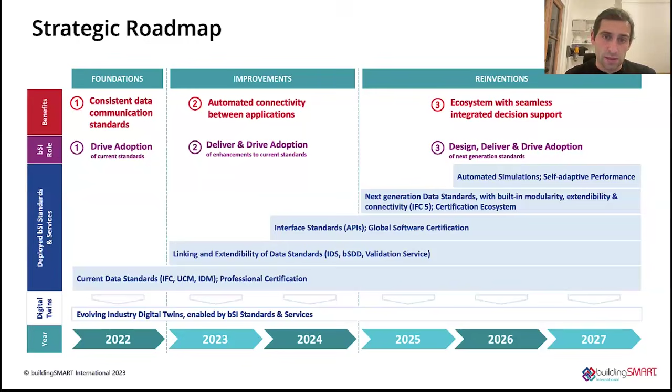What is interesting about how we put the geospatial context to that - I said earlier that everything within the BIM world has a location associated with it. When you think about radical advances in GPS and camera technology for things like photogrammetry, we can start to envisage how BIM and GIS workflows will really improve the lives of stakeholders and end users that consume this type of information.

In our strategic working groups, I'll highlight that we've had a BIM and GIS conversion group working for many years developing this work, focused on use cases and how we might align things like IFC, CityGML and LandInfra. We partnered with OGC on this and continue to lead a working group in this area. So we clearly see this as a huge priority, with work spanning many years around this topic.

I'm also reminded that this year I was very much struck - the idea stuck with me - it was Michelangelo Cianciulli at our summit in Rome who brought that idea to my head, which was there are incremental innovations and radical innovations. Incremental innovations happen continuously throughout our work life. We maybe don't notice them day to day, but over a certain period of time, we might look back and say, wow, can't believe we used to do that.

I might cite an example: I went to an oil and gas event around 2011, and at the time they were saying absolutely no way they're going to move to cloud technology. Fast forward 5 years, the whole conference was about cloud technology, because although that's a radical innovation, the incremental changes happened and then they became reliant on that new technical capability.

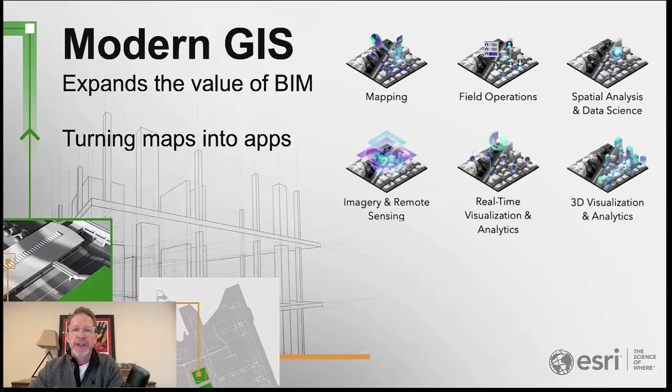Most people understand GIS to be a mapping solution, but it's much, much more than that. It's a suite of mobile applications for doing field data collection. It's the ability to do spatial analytics and deep data science across many types of data sets. It includes imagery, remote sensing, visualizing and analyzing information in real time from various sensors. It certainly is more than just 2D these days. 3D, certainly BIM, included with 3D maps and terrain, provide amazing visualization and analytics capabilities. It's a data management platform for understanding data of various types, including BIM, GIS, IoT sensors and imagery. And in the case of Esri, it's a suite of developer capabilities, APIs that allow you to take our base applications and base capabilities and extend them in many ways, and we'll get into that today.

BIM integration within the Esri suite of products, the ArcGIS solutions, goes back many years. As far back as 2015 with our flagship product ArcGIS Pro, where we started bringing BIM data into the Geo database, created the concept of a scene layer package. In 2017, we formed an alliance partnership with Autodesk, which really opened the door for us to extend the capabilities of our GIS platform by adding Revit integration.

A couple of years later, we extended ArcGIS building scene layer to include many different types of information specific to BIM and AEC workflows. Around 2020, ArcGIS Pro had an integration with the BIM cloud connection that Autodesk provides. And then around the same year, we extended our capabilities of ArcGIS Pro to have Civil 3D integrations.

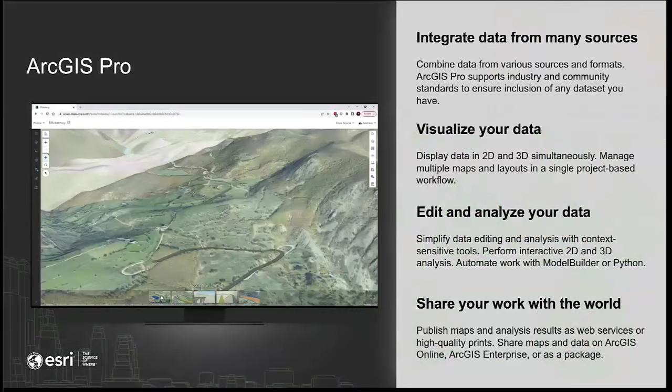So ArcGIS Pro, this, like I mentioned, is our flagship product. Any architect, engineer, construction professional who's working with CAD applications, imagery information, needing to visualize data, needing to edit and analyze a wide range of data, should have a copy of ArcGIS Pro sitting right next to their CAD and BIM solutions. The workflow is typically to create models, create scenes, create environments in the desktop application, and then share that work with the world through online environments like you're seeing on screen right now.

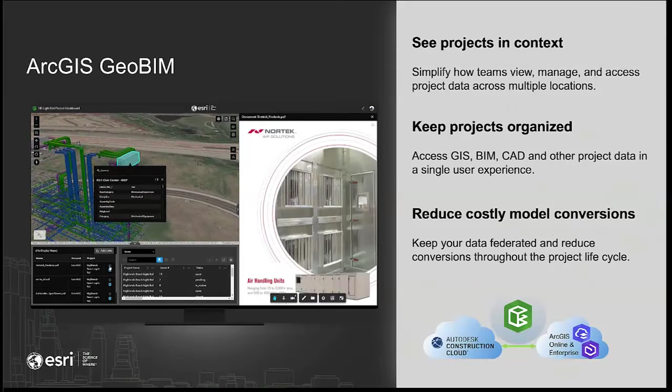ArcGIS GeoBIM, I mentioned this a little while ago. This was released about 2 years ago. This brings together the Autodesk Construction Cloud with the ArcGIS Online and Enterprise environment. So in a single desktop, you're combining the large-scale view of GIS with the more detailed view of BIM, in this case with Autodesk Construction Cloud.

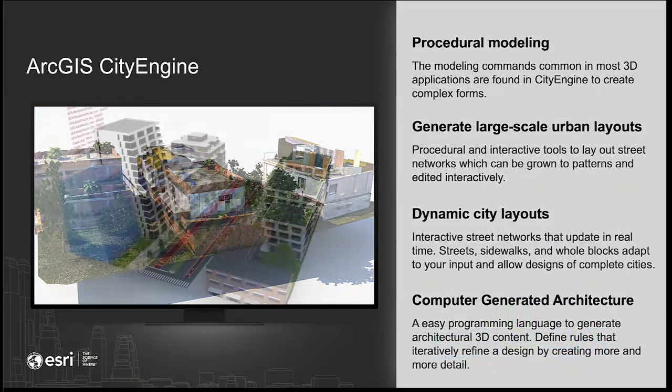And we have another application called ArcGIS City Engine, really one of my favorite products from Esri, which is a procedural modeling application. 3D entire cities are created through parametrics, large-scale urban layouts, and entire city layouts dynamically generated through parametrics. A computer-generated architecture capability enables the kind of environments you're seeing on screen, and we have IFC 2x3 export in that application.

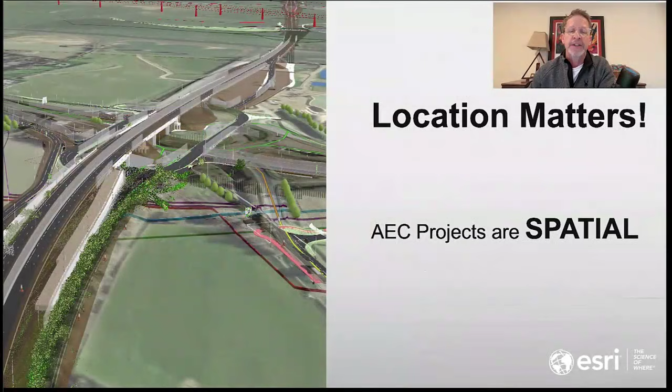So why in the world of AEC should GIS matter? Well, GIS is all about location. And certainly in the world of AEC, where projects are spatial, location matters.

Location acts as an integrator, a connector. It brings together the many types of massive data sets used in AEC workflow. Location acts as this common denominator and connector of AEC data. When you're able to connect data in a single application, viewing CAD and BIM, demographics information, weather patterns and traffic flows, when you're able to bring all this information together that typically exists on different people's desktops, you're actually able to connect people in a way that enables digital transformation.

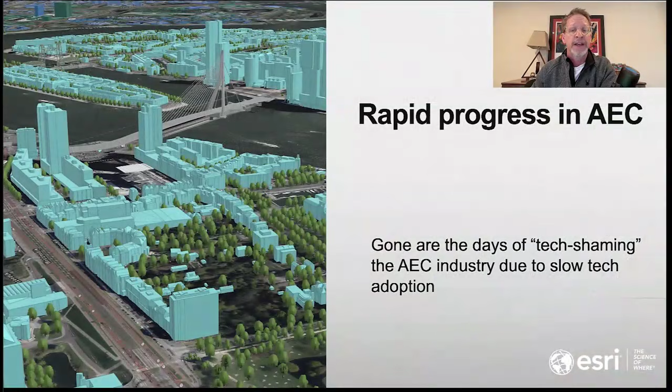And I would argue that digital transformation is critical for effective AEC project delivery today. The integration of data, the integration of apps is happening. It is required for effective project delivery, and digital transformation is happening in this industry. In fact, I would go so far as to say there is rapid progress in the world of architecture, engineering, and construction. Gone are the days where we're a little embarrassed about not adopting technology as fast as other industries, and I would say that the AEC industry is in fact leading the charge with the adoption of technology.

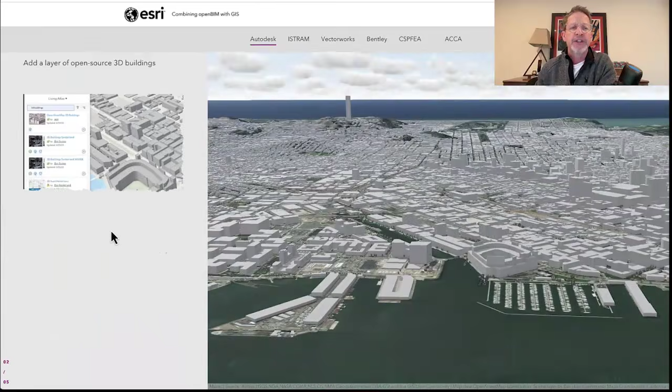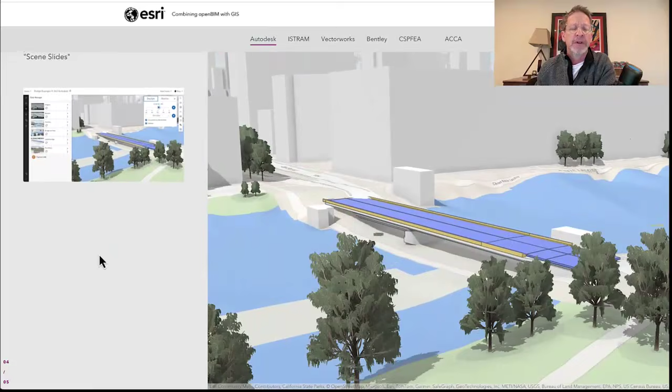I can zoom in to an area on the peninsula in San Francisco. We add a layer of 3D information in the form of OpenStreetMap data, including stadiums, roadway, buildings, elevation, etc. In this case, we created a model in Autodesk InfraWorks, exported it to IFC 4.3, and then imported it using the tools that come with ArcGIS Pro, our data interoperability tools. We can change our view, change the level of detail of our trees to be more detailed, and we start to see the bridge in context. Turn off a few layers, change some transparency, and you can actually see the individual objects that make up this bridge with the properties that began in a BIM modeling, a BIM authoring tool, in this visualized environment right here.

And again, this is a dynamic view. This is a real 3D map. This is not just a static image.

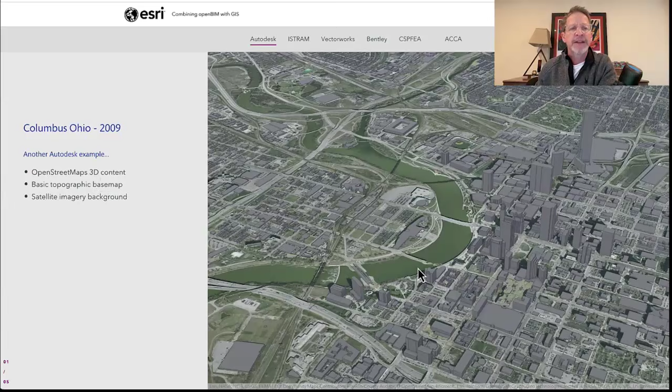Here's another example, similar workflow. Again, OpenStreetMap 3D content combined with a basic topographic map of Columbus, Ohio. This is the satellite imagery and the architecture from 2009. The city undertook a riverfront development program where you can see the same information. The river is a little bit lower and a little bit of development has occurred at the riverfront in this 2015 image. And here we see a 2021 view with a proposed bridge in place, again in this 3D environment in this story map.

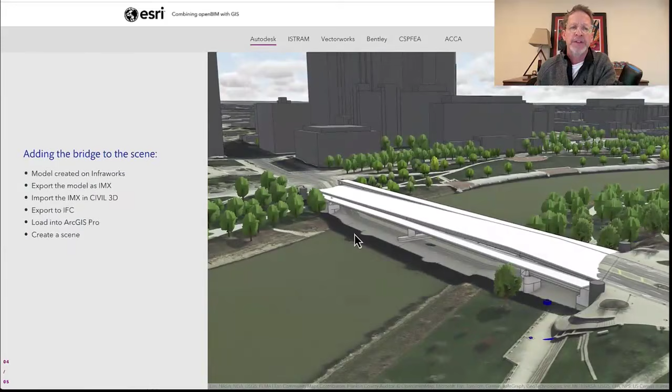So we added the bridge to the scene in a similar way that I described a moment ago, starting out in InfraWorks, exported the model as an IMX file that came into Civil 3D, and then from there exported it to an IFC into ArcGIS Pro. Again, these objects maintain their properties, the parameters, the attributes that began, here you can see IFC 4.3, in the modeling application itself, maintained and made available for GIS capabilities.

Again, change our camera angle, change our transparency, turn on and off some objects, and you can see all the way down to these structural elements, all the properties that you would expect to see in a BIM authoring tool, maintained and brought over for GIS purposes.

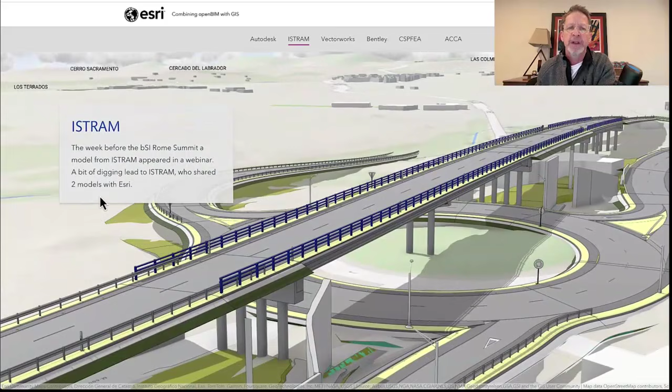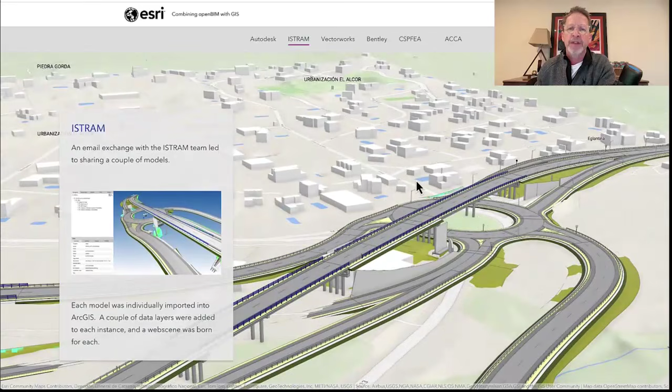Another application generates IFC files, a company called ISTRAM. This was a model that I came across about a week before the buildingSMART Summit in Rome last year. So I reached out to the modeling company, ISTRAM, and asked for a model they could share with me. Again, similar to what you saw in the other environments, this 3D model has GIS information, has BIM information, has OpenStreetMap data.

Here's the same view in a BIM viewer, and here's the view in a GIS viewer. All the geometry, all the non-graphic properties, they're all intact, ready to be used for various location-based workflows. Here I select on the handrail, we can see it's a railing, and again we see the source of the information, we see the IFC data. Again, it's 4.3, this was release candidate 4 from last year. All these properties are available for BIM and GIS workflows.

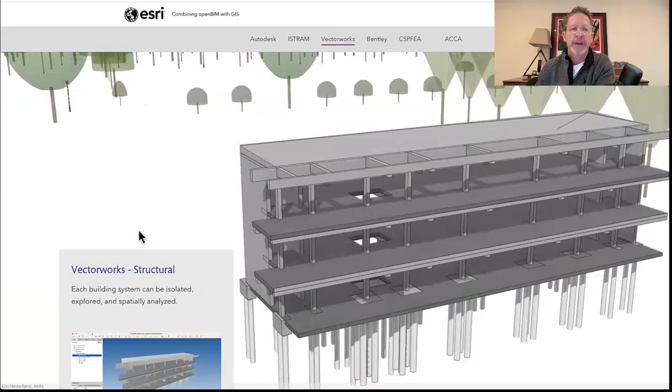Another company, Vectorworks, exported to us multiple IFC files, the architectural wrap of a building. We isolate it down to just the objects that I'm interested in, change my view, turn off the shell of the building, isolate just the structural elements, do the same thing down to just the mechanical system.

And as we saw with the infrastructure objects, the model objects in this GIS environment, this is IFC 2x3 content, is maintained in this GIS view.

Bentley as well. Here we have a combination of tunnel and road information in a city environment. We turn off most of the information, make it transparent. We knew where in Sydney, Australia this was, its easting and northing, so we were able to place the project.

And again, this view is interactive. It is real-time 3D model objects that we can change our view, change our perspective, turn on and off objects, and again, we see the BIM properties that came over as IFC content brought in to ArcGIS Pro and saved as this web scene.

This is an interesting project. This is a company called CSPFEA. I met them actually in Rome at the summit, asked them to provide me a model of one of their bridges. This was an IFC 4.0 file.

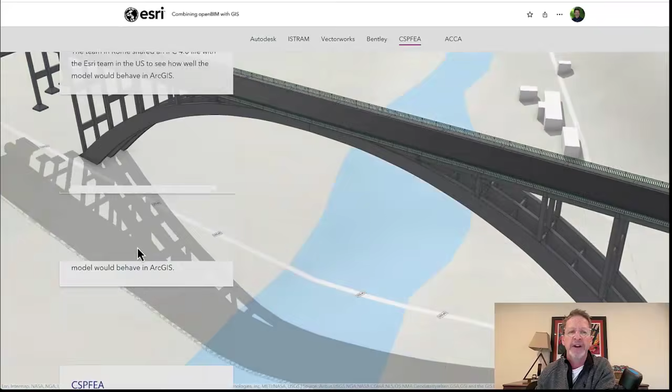And again, just another example of infrastructure content exported to IFC, brought into ArcGIS Pro, and then saved as a web scene. You can see again, in this 3D environment with terrain and buildings and the model objects themselves, the properties of those objects are available in a GIS view for BIM workflows.

Finally, I don't want to steal the thunder of our friends at ACCA Software, but they have got some of the most impressive capabilities as it pertains to IFC, BIM content, GIS, brought together. I've just taken a couple of examples they shared with me, sped them up, put them into this little video, but I'm going to let my friends at ACCA take it from here.

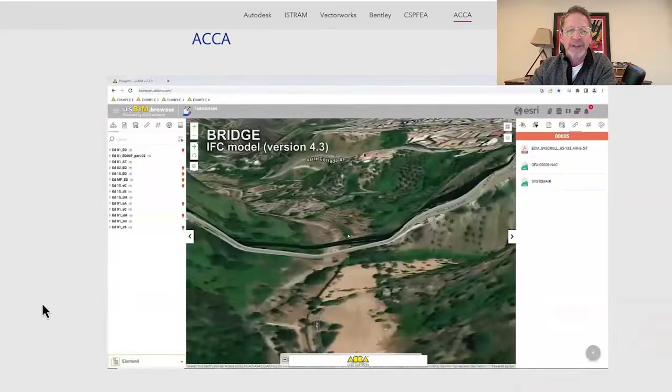Thank you so much for the opportunity to present and share and talk about openBIM and GIS at Esri.

Thank you. Bye. Thank you, Mark.

I would now like to give you a more detailed overview of the ACCA technology for openBIM and GIS integration. usBIM.geotwin, GIS Digital Twin is the technology from ACCA Software for the openBIM and GIS integration. It allows you to view, analyze and manage all construction data around the world in a single digital twin with the power of IFC, openBIM and GIS.

Technically speaking, it is a dynamic connection between ArcGIS platform from Esri and usBIM platform from ACCA. It is based 100% on openBIM formats, and in particular, it has also been recognized in the latest buildingSMART International Award with a special mention.

What I would like to do now is to show you some possible use cases that we have developed by using this technology. In particular, we will look at IFC models up to version 4.3, both for buildings and infrastructures, and we will see use cases regarding asset management, asset operation, facility management, and IoT.

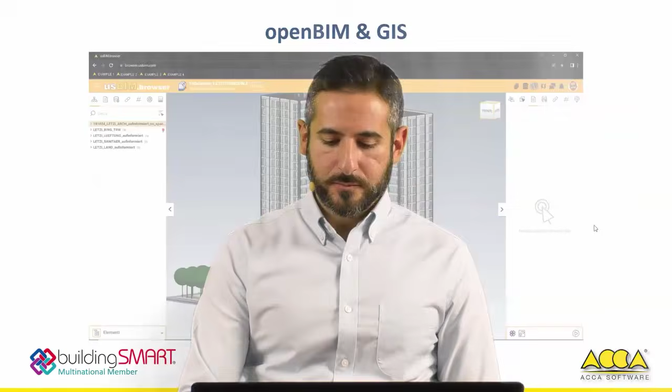So let's start by having a look, starting from our platform usBIM from ACCA Software. This is the BIM user that is looking at an IFC model. In fact, this is a federation of IFC models composed of the architectural, structural, and MEP models. In particular, each object has all its own properties.

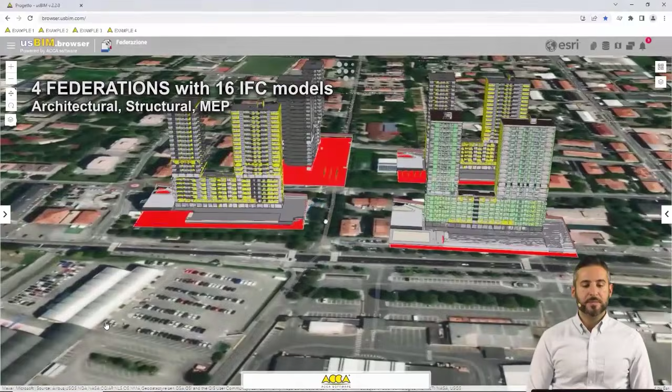Now, let's move on to the GIS view and let's see the same model, the same federation, replicated 4 times on the GIS map. Here we can see that we have all the same functionalities with regards to viewing operations. And of course, these are the full detailed models.

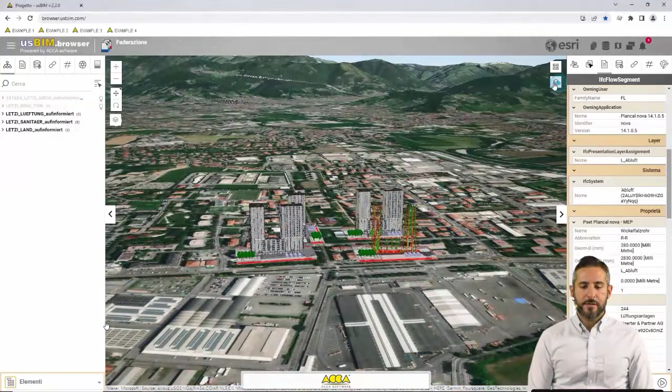So if we select objects from the GIS view, we can see all of the properties. Here, similarly to what we have done on the BIM platform, we can use visibility to hide, for example, the architectural and the structural model. And again, the level of detail, both geometrical and from an informational point of view, is completely available on the GIS side.

So basically, this is the dynamic connection between GIS and the BIM world. Let's move on to other more complex examples.

This one, for example, is the city of Barcelona in Spain. It is composed of 2,000 IFC models for a total of 120 gigabytes. Here we can see that the geometric level of detail is very accurate.

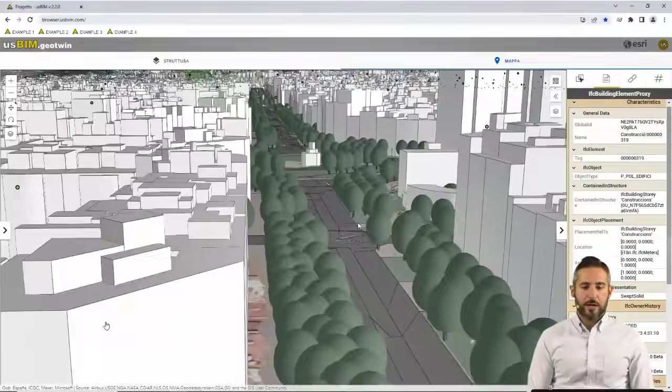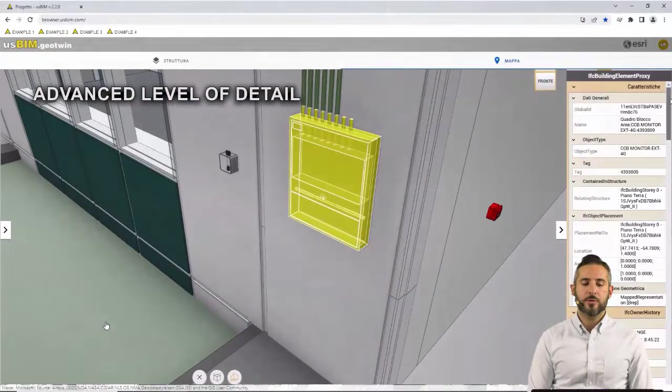But this is not a problem. Once we have the models on the GIS view, when we have more detailed buildings and models for the city, we can substitute the low-level detail ones with more advanced level of detail, like the one that we are looking at in this example. Again, this is a composition of the architectural, structural, and MEP part.

So this is the whole Barcelona city, digitalized by using IFC.

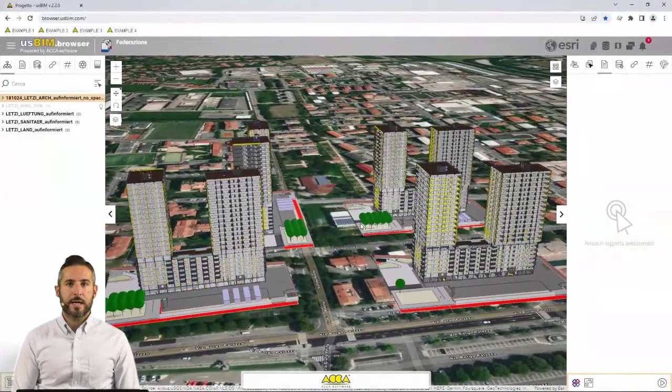This other example goes back to the first example we showed, to demonstrate what a dynamic connection between the BIM world and the GIS world can do. Let's move to the BIM part: the BIM user wants to update the federation of models, and in particular is going to add a new model to the federation. So the building that appeared now was not available previously.

What happens on the GIS side is that this information is dynamically updated, so the information is available in real time, and the updating of the model on the GIS side is in real time.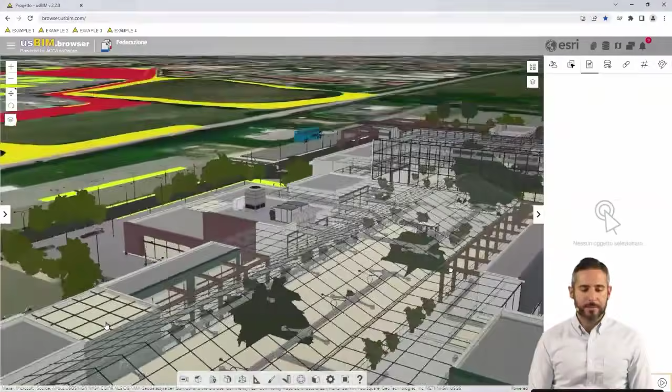Of course we can combine all the available data from the BIM world and the GIS world and visualize them all together. Moving on to more complex use cases, let's focus on asset and facility management of IFC models, in this case of a shopping center.

Here we have three systems playing together in real time: the BIM platform providing data from the IFC models, the GIS platform providing data for the GIS part, and a dynamic connection with the facility management system.

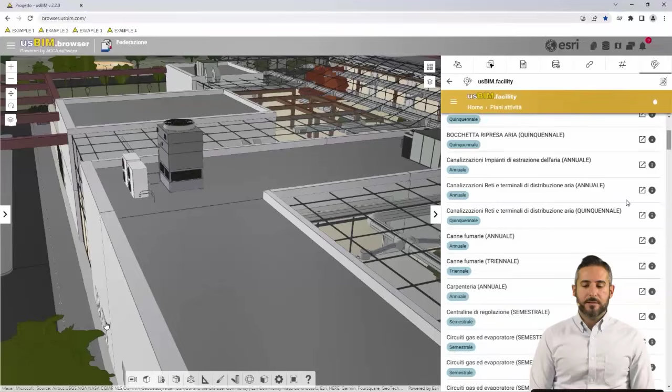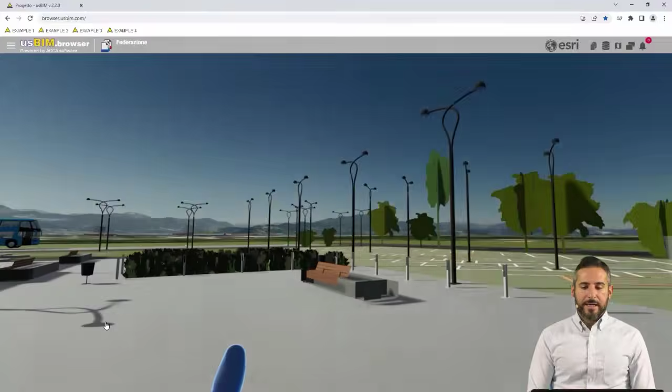We are looking, for example, at some open tickets from the maintenance system, and we can localize such information directly on the entities of the IFC model. All of this data is dynamic and is not copied over from the different systems.

Of course, we can also use other technologies such as virtual reality to navigate the models. We will see a more complex example later on the use of this technology. But now let's move on to another example.

This in particular is the Naples Railway Central Station. It is geolocalized and is a composition, a federation, of 56 IFC models. We can see it geolocalized on the map, and we can use different kinds of maps.

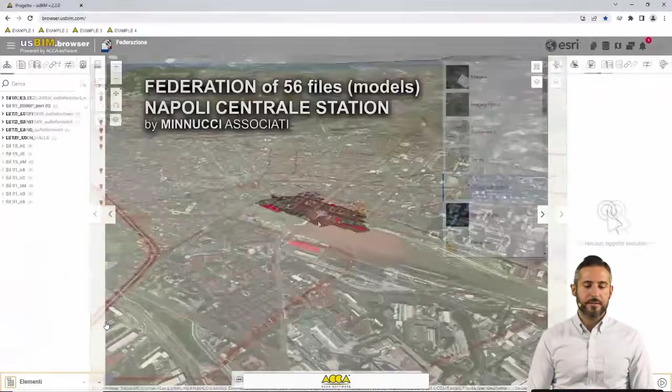Here we can see all 56 IFC models federated together and viewed directly on the GIS view. We can also see how it is possible to connect external information such as documentation, images, and so on, directly to the entities of the model. Here, for example, we can see how we have attached such information to such entities.

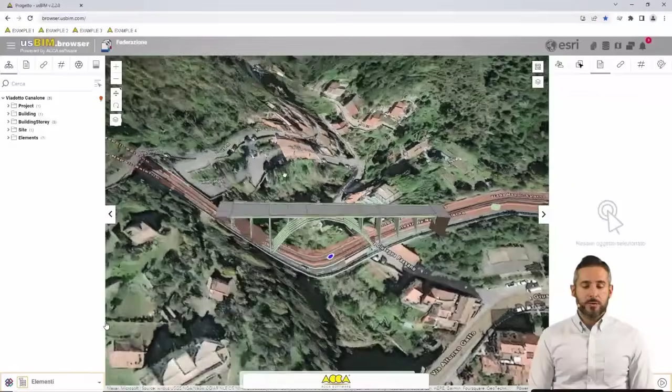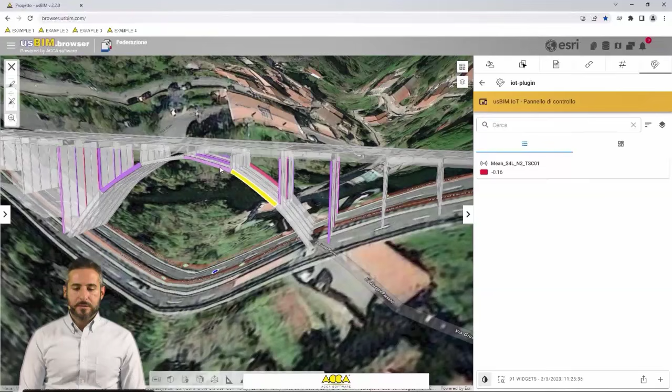Another possible use case is the use of IoT, Internet of Things. Basically we can, in real time, get information from sensors, for example for a bridge monitoring use case. The values are real time and update the model to show if the values are normal or if there is some problem with the bridge. So the sensor and the BIM model are interacting with each other in real time.

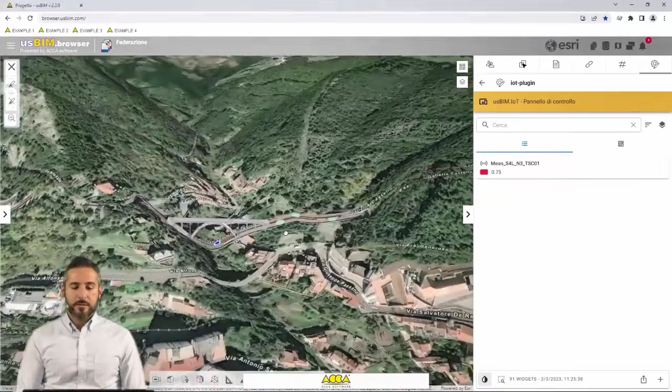Now, if this is useful even for one bridge, since we are on the GIS at a territorial scale, you can imagine how useful this can be when you have all the models of the bridges with all the sensors together. Moving on, we can see another example.

This in particular is a road developed in a buildingSMART Italy project, an IFC 4.3 model developed to show the potential of the new IFC standard schema for linear infrastructures.

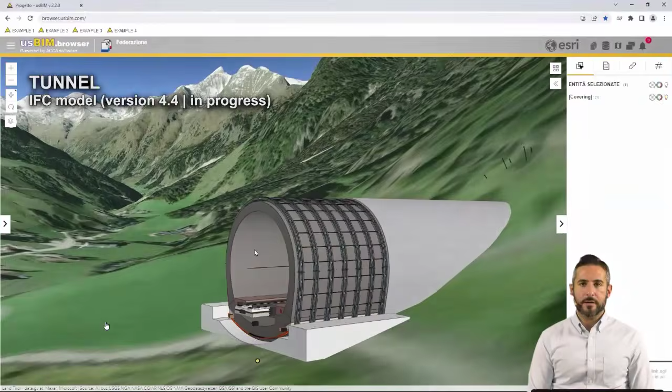And here we are moving on to another example of the new and upcoming IFC 4.4 schema dedicated to tunnels. This in particular is a first attempt from ACCA software to digitalize the construction of a tunnel, so this is ACCA software's contribution to the IFC 4.4 schema project from buildingSMART.

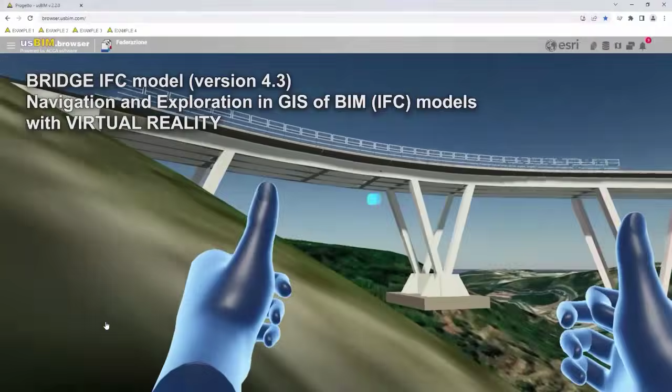Bridges are another important linear infrastructure affected by the new standard. Again, we can see how we can use other technologies such as virtual reality to navigate and explore BIM models from the GIS view.

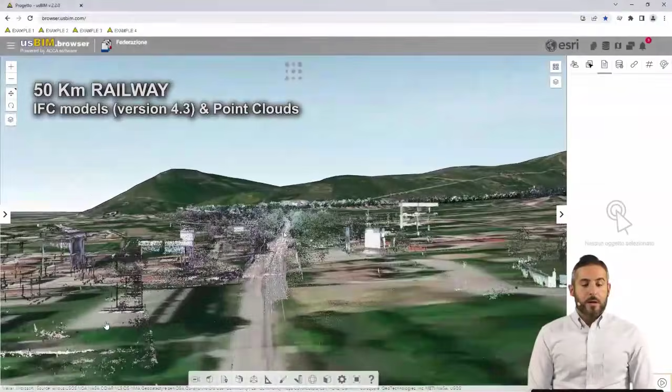So we now have both the point cloud and the IFC model put together on the GIS view, and this combined view can be navigated directly. So we have both the point cloud and the IFC model.

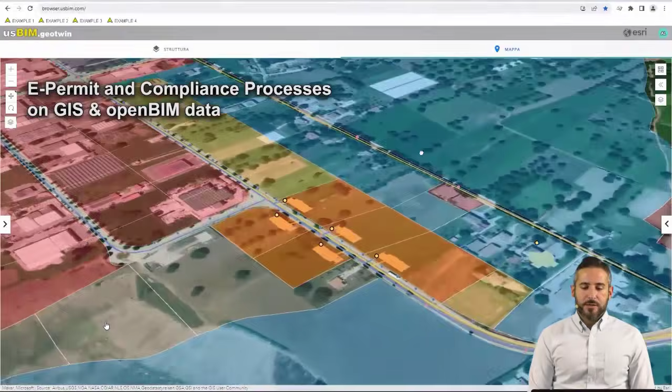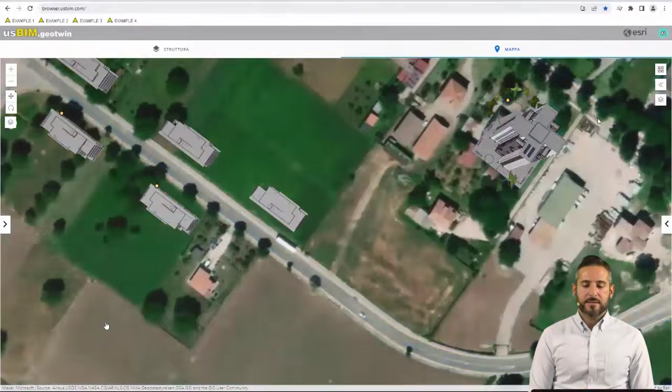But the potential use of such combination of technology allows us also to think about permitting. So for example, when we have the data from the GIS layers and the openBIM data, we can do spatial analysis based on GIS and openBIM data. Let's say we want, in a certain radius from a certain building, to do some kind of data analytics and spatial queries.

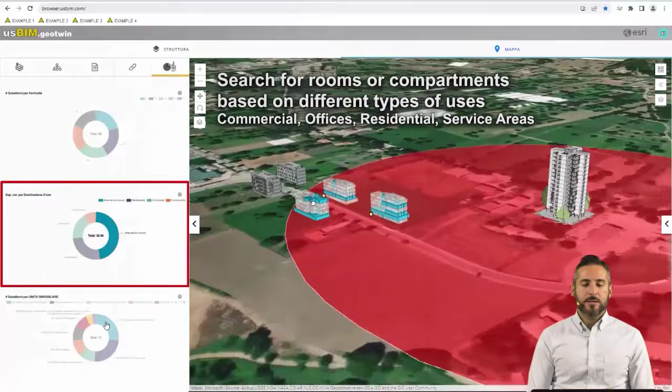So for example, here we are looking at the spaces of the building, and we would like to search for rooms or compartments based on different types of uses, such as commercial, offices, residential, and so on. All of this by combining both the GIS and openBIM information.

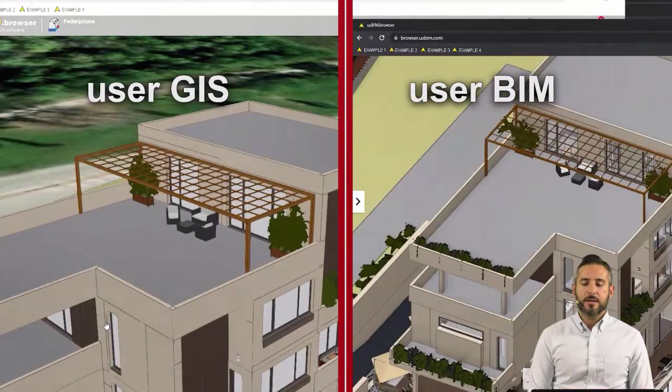Crucial is the fact that the openBIM information can be dynamically updated, and everything on the GIS side will be updated dynamically accordingly. So, for example, if the BIM user is acting on the openBIM model, by moving objects around or updating the properties of the object, on the GIS side the user will see all of this happening in real time, because the connection between the two systems is dynamic, and there is no exchange, no copy of data, but only dynamic exchange.

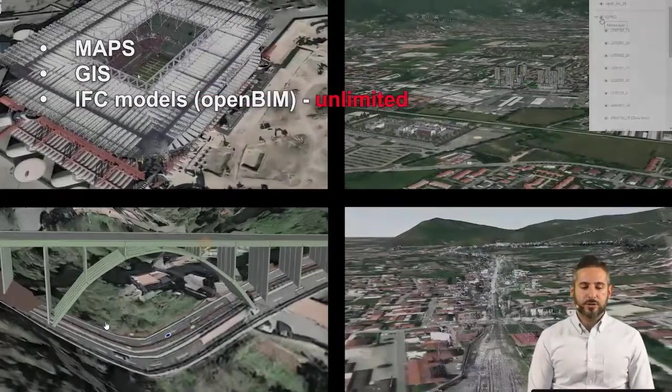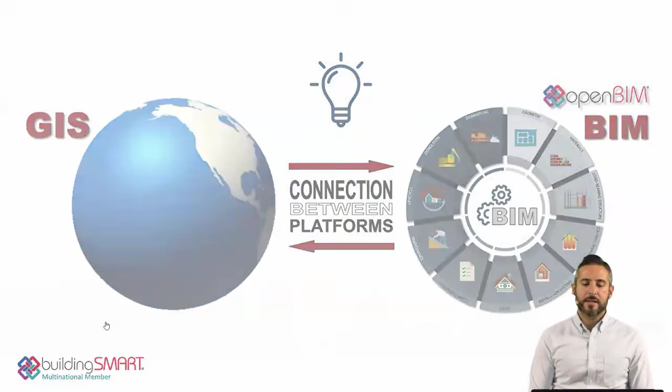So what we have seen so far is the use of maps, GIS, IFC models, point clouds, spatial analysis on the GIS and openBIM data, and asset and facility management systems talking to each other in a dynamic way. This covers basically the entire life cycle of the building, whether it is a linear infrastructure or a classical building. And this is the integration between the GIS world from Esri and the openBIM world from ACCA software.

And now let's hear from the RFI team, who will show us the path they are following to implement the Geo Digital Twin within the company.

Thanks, Michelangelo. RFI is the manager of the National Railway Infrastructure. Our main activity consists of maintaining the network in order to allow railway companies to operate safely, and making investments for the improvement of the network, railway lines and installations - more than 17,000 kilometers of network, of which 1,500 are High Speed - employing almost 29,000 people and allowing more than 9,000 trains belonging to different companies to run every day.

In the international field, RFI promotes the integration of the Italian railway infrastructure into the European network. Our strategic projects evolve systematically in different business sectors based on the fundamental principle of asset management for value creation, referring to an asset-centric view, risk-based decisions, and systemic management.

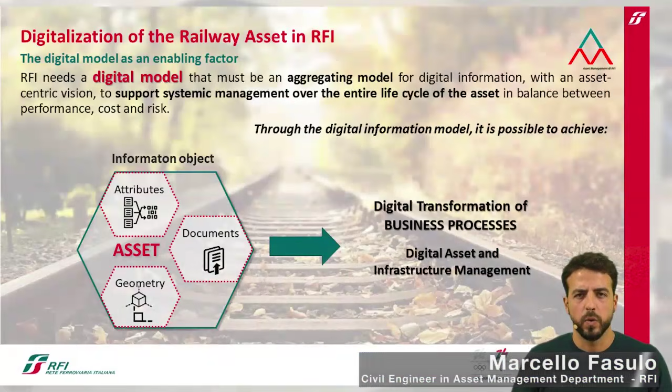A digital model that aggregates asset information can support systemic management over the entire life cycle. This approach involves the re-engineering of company processes with the aim of operating a digitalized management of assets on the railway network, integrating the different systems in the company in a logic of synergic, corporate, and sustainable operation.

Starting from existing assets, it will be possible to create a digital twin in order to support activities on assets and take the opportunity of changing.

In terms of new digitalized information management, focus is set at involving the decision-making processes, monitoring of complex systems, the simulation of network activities and corporate communication, defining a clear digital transformation.

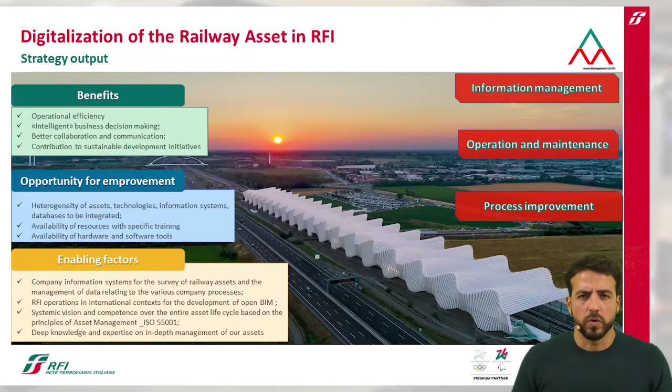Strategy for intelligent asset management requires a structured approach coherent with the organization's goals and objectives. Digital twin technology can speed up and optimize this process.

To realize the strategic vision, Rete Ferroviaria Italiana entrusted asset management with the guidance and coordination to set up the strategy shared within the company, coordinating working groups established with specific objectives, and reporting to the BIM committee, chaired by top management, on the progress of activities for the definition of strategic choices.

Asset management constitutes the corporate interface to the outwards, participating in working tables with stakeholders, in identifying research and development initiatives. In fact, since 2018, Rete Ferroviaria Italiana is a member of buildingSMART International, participating in the IFC Rail project for the definition of the IFC 4.3 standards.

Therefore, what has been done so far? We are developing the IFC 4.3 standard in the rail industry, validating it and defining modeling rules and standards. We are implementing an internal training plan about openBIM, involving about 500 participants, with 150 of them already certified.

We have established the digital room where BIM methodology can be implemented through the development of specific proof of concept, in collaboration with the Italian chapter of buildingSMART International and ACCA software.

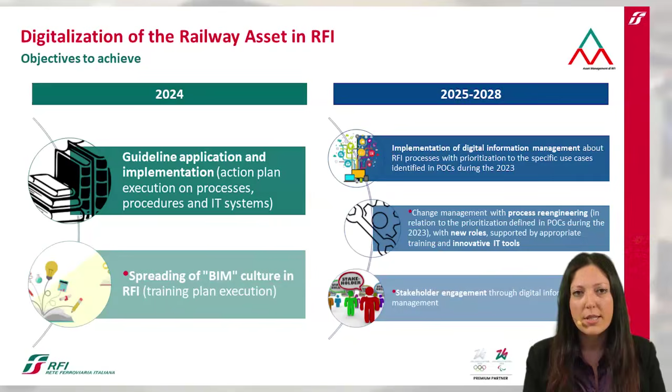For development of proofs of concept, the available ingredients included the availability of digital models of buildings and installation, linear infrastructures, infrastructure works, library objects, and surveys from MUIF of existing works.

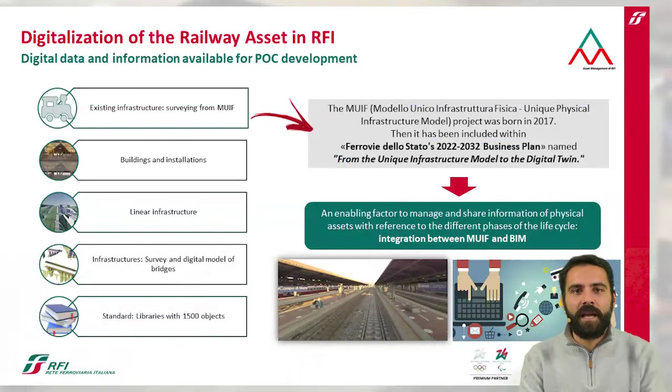The MUIF, Unique Physical Infrastructure Model, project was born in 2017 with the aim of providing a single georeferenced representation of the railway infrastructure, to which the different logical views of the network can be related.

Subsequently, this project has been included in the company's business plan that will be concluded with projection to 2032, developing the integration between MUIF and BIM for the information management of physical assets through the use of digital models.

Rete Ferroviaria Italiana launched a nationwide campaign of surveys of the national rail network, carried out from 2017 to 2022, to return a 2D vector representation and the physical representation of the infrastructure at different levels of detail, according to the different usage needs.

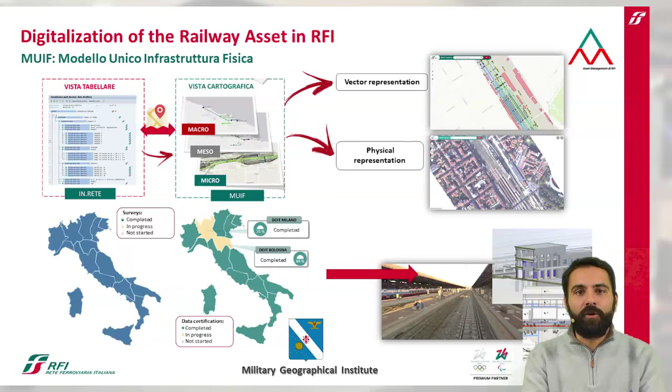Information from MUIF can be used to define digital models, and new information from new assets in the update digital models can converge in MUIF in order to use updated digital information.

With the view of a continuous updating improvement and with the integration of the best technologies on the market, the MUIF system, based on 2D GIS representation, needs to evolve to a new way of navigating information.

Through the integration of GIS and BIM, it is possible to build the Geo Digital Twin. This will allow all digital content to be georeferenced to it, increasing the level of detail of the network and the models by defining a prioritization strategy based on actual company needs.

Critical success factors to be considered are production of 3D models, updating of data and models, implementation of technology for use of Geo Digital Twin, and integration with strategic business systems.

Based on the current company processes impacted by the implementation of BIM and Geo Digital Twin at RFI, use cases have been carried out to represent the final results of the analysis and the benefits that such technology will bring.

Starting with some proof of concepts, the working group identified some use case scenarios, looking mainly at the interaction of the digital twin with the company IT systems in use at RFI.

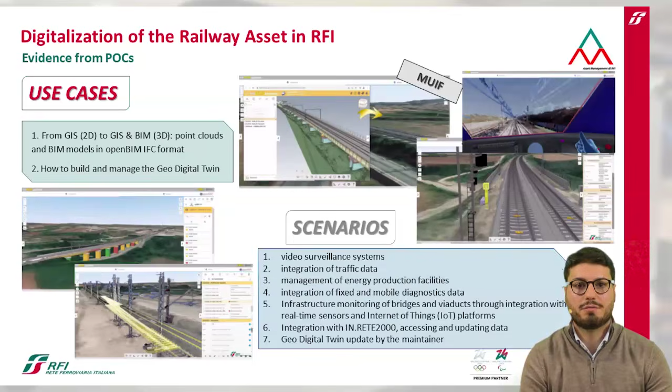A video will show you the result of the one-year experiment in RFI. Thanks, guys. I think that now it is time to have a look at all of what we have said so far in practice. Let's hear and have a look at this success story from RFI, presented by Giovanni Esposito from ACCA Software. Thank you, Michelangelo.

Let's see together the technical results of the project. Rete Ferroviaria Italiana Railway Infrastructure is a complex one to manage.

Evolving MUIF 2.0 will ensure an openBIM compliant management. The project proposal starts evolving the current MUIF, which is based on a 2D GIS representation, to a new way to navigate the information already available, adding openBIM 3D model with their information.

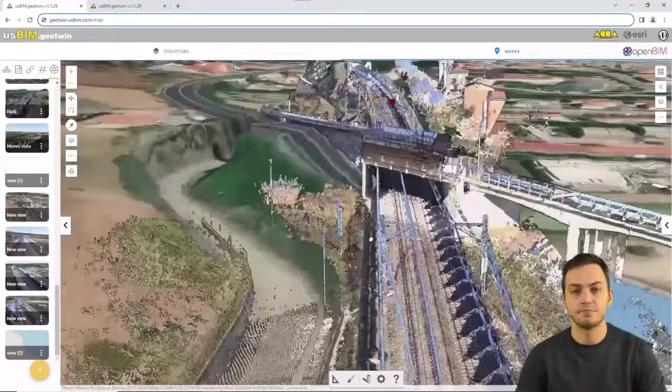So we are going to significantly evolve the current representation of the railway infrastructure, starting from a technology known and used inside the RFI. What we are seeing are the resources produced during the previous MUIF survey campaign in the new navigation mode offered by usBIM.geotwin.

But how is the Geo Digital Twin produced? Let's see it together.

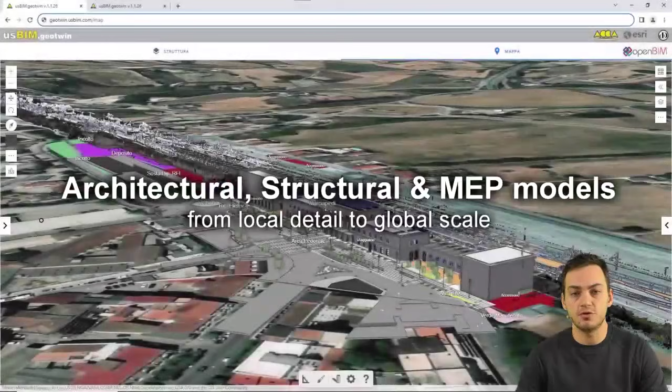The strategy is to start with the production of a basic model of the infrastructure derived directly from existing surveys that can grow over time. This model will be usable alongside the digital resources already available and will give access to all the information that BIM objects naturally bring.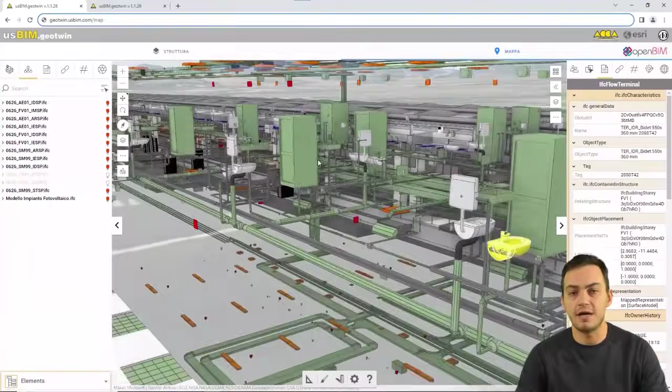The challenge we set was to understand how to systematize all the information at our disposal. Let's take the Benevento Station project as an example, consisting of a structural, architectural and MEP model, and how the technology is already able to support the highest level of detail. We are seeing just how the new MUIF will be able to scale up complexity from the smallest detail, the specific terminal, to the entire world.

To increase the consistency of the Geo Digital Twin, we can feed it with other data sources. For example, specific survey campaigns of viaducts serving the network will be incorporated into the system according to the new company standard and guidelines.

But the group's various project initiatives overseen by the different companies will also easily find their way into MUIF 2.0. We are seeing here the Irpinia Station project located on the GIS map.

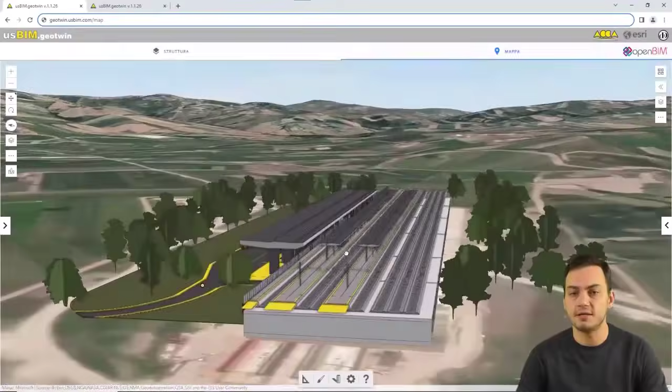Rete Ferroviaria Italiana already has a library of standard BIM objects in AECO openBIM format. These resources will also contribute to update the MUIF. They are organized in a centralized library, and thus, over time, all objects on the network will be able to have their equivalent digital twin and be included within the system.

The new navigation experience will be innovative and will enable seamless navigation of all digital resources available, such as 360 photos compared to point cloud and BIM models.

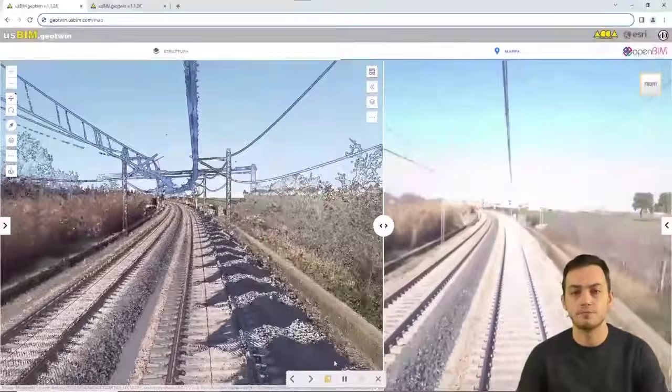Let's look at an example. Here we are looking at a pole spotted in reality on the 360 photo, and on the left side we are instead seeing its equivalent digital twin, both in point cloud and BIM object form. All these digital resources have been released starting from the object that exists in Rete Ferroviaria Italiana's standard library.

Even the latest technologies, such as immersive virtual reality, can be used for simulation scenarios, as seen here during the driving phase of a train.

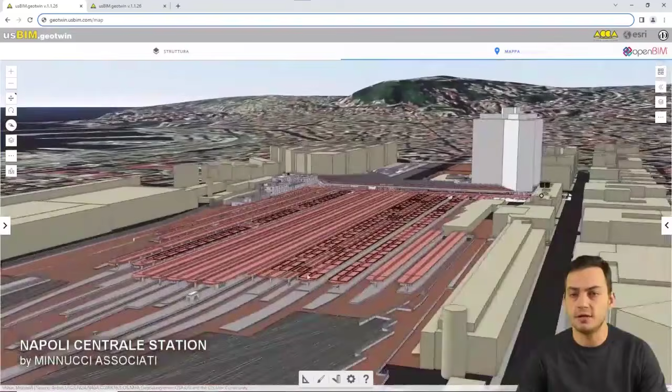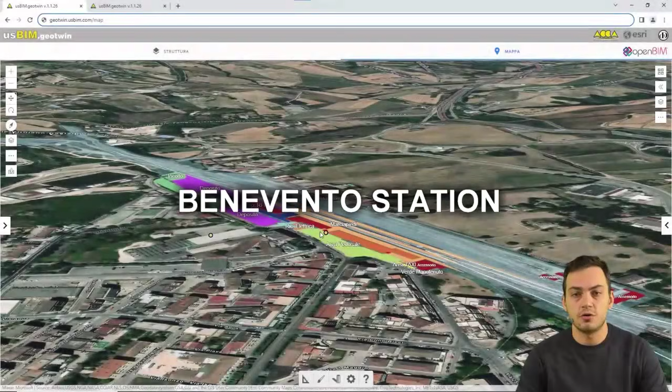Let's look at some use cases related to the Geo Digital Twin. The first use case we show is related to video surveillance. We are browsing into the Naples Central Station. Walking through the BIM model of the entire station, we reach the platforms area, and we can activate video streaming that real-time shows us the situation on the specific platform for security control.

Let's look at two more use cases realized on the Benevento station. The first use case looks at the integration of traffic data. MUIF 2.0 will provide access to any piece of information managed with the IT system used in Rete Ferroviaria Italiana from the different locations and routes surveyed within the system.

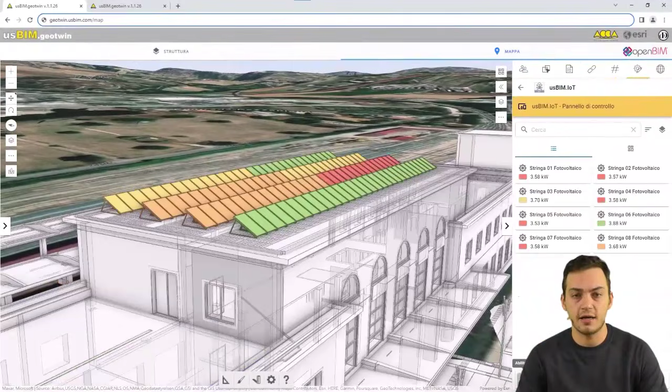A further possible use of the Geo Digital Twin to support asset management is related to photovoltaic production plants monitoring. First of all, the technology allows all technical and non-technical document resources to be integrated into the MUIF object. We have seen how to access the technical information attached to the inverter. In addition, we can access and evaluate plant production data individually or historicized thanks to the integration via the IoT paradigm.

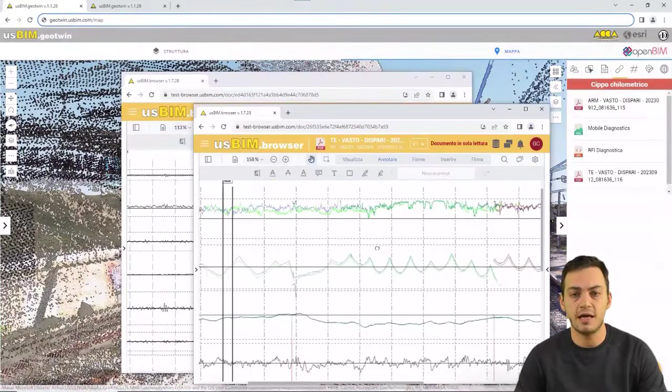Other interesting experimentation was conducted with the integration of information that comes from diagnostics. At the first instance, all the elevation data of the line can properly be extracted from its geometry, but the data of the fixed and mobile diagnostics can also be related punctually on the network, such as in that example.

Functionalities supporting safety, planning, and cost estimation scenarios were imagined for supporting the construction phase in line with 4D and 5D BIM best practices.

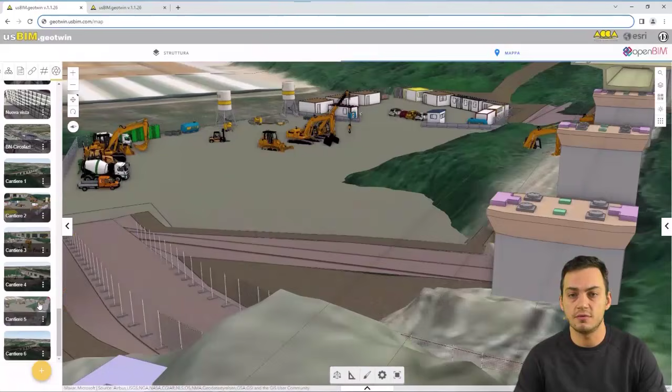Directly within MUIF 2.0, it will be possible to carry out simulation and evaluation on the various ongoing active working sites, consulting the entire available dataset that constitutes the digital twin of the working site. It will be possible to directly navigate the model of the specific work site, and it evolves over time so that all points of interest can be fully assessed.

The navigation of this simulation is also ensured through real-time rendering and immersive virtual reality technology, enabling users to better understand the scenarios.

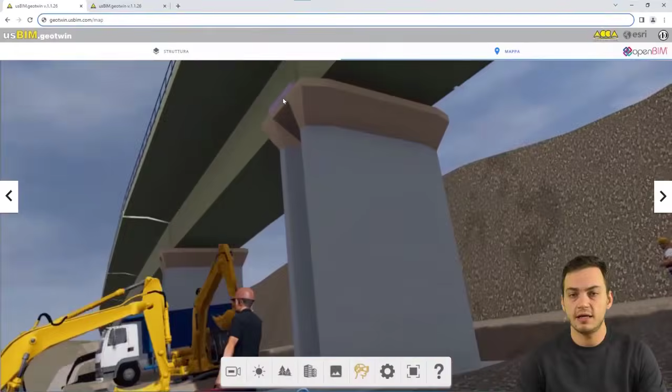This functionality can also be exploited to support the training of resources that will be on working sites. Another relevant application related to IoT integration concerns the current topic of structural monitoring of bridges and viaducts. The platform, in this sense, will be an active system that will return warnings and graphical feedback to the user, supporting decision-making.

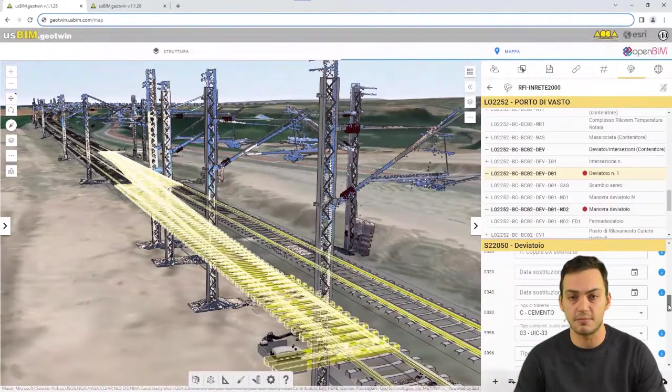Let's look at a use case related to RFI's mission, namely the maintenance phase of the network. The system we have imagined and implemented in this experimentation has been designed for the maintainer, so that he himself can interact bidirectionally with the InRete 2000.

Here you can see how the end user not only can quickly read data from InRete 2000, but also update it at the same time, using simple interfaces, thus guaranteeing the consistency of the information. The maintainer is the main user of this system in our vision and has an active part in the digitization process of the infrastructure.

Teams on field can digitize new assets that are not available among the digital assets inside the BIM object library, thus bringing them into the Geo Digital Twin. This railway interchange is certainly not a standard object, but it is nevertheless possible to survey it and hook it up to the corporate information system by having a well-defined workflow and technology that supports the use case.

The MUIF 2.0 Geo Digital Twin does become the central system for the management and maintenance of the entire railway infrastructure. Every piece of data is geolocalized and accessible in real time.

Wonderful, Giovanni. Now back to the RFI team to hear what they have to say about all of this.

The experiment design use cases fully fit into the completeness of BIM dimensions. As a 3D BIM, the effort focused on maximizing the use of 3D drawings available and those that will be received by the suppliers, with the goal of making them accessible and searchable.

BIM 4D and 5D use cases pertained to the planning and costing phase, so as to maximize the return on investment even during the construction phase of the new works. BIM 6D, since these are dimensions closely linked to the strategic activities and mission of the company.

Use cases were geared toward ensuring that all information produced today within different systems would be received or centralized, where applicable, within the Geo Digital Twin.

BIM 7D, with reference to the sustainability dimension, we declined the use case related to monitoring information from the field, useful for increasing the service life of the work. For example, diagnostics, maintenance, efficiency, and the long-term performance of railway infrastructure.

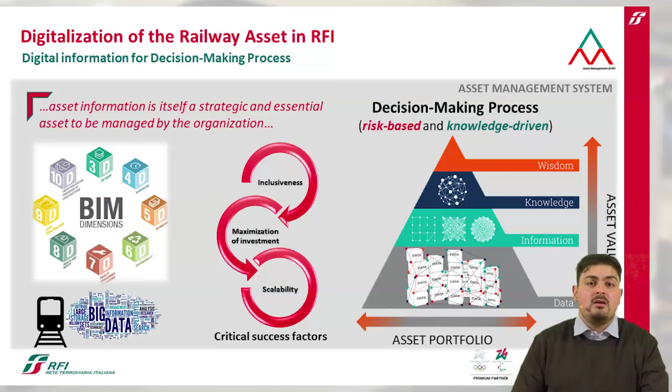Thanks again to all of you guys. And now let's ask some questions directly to Donatella Fochesato, Asset Management Manager at RFI.

First of all, I would like to ask what are the critical factors taken into consideration for the success of the project? The project scope includes all infrastructure assets of the entire asset lifecycle. This project is inclusive, technologically democratic, and scalable, in order to maximize the return on investments.

First, inclusiveness, intended as the ability to involve the widest number of stakeholders belonging to the entire supply chain, including also non-technical profiles.

Then, maximization of investment. The issue of technological continuity and the integrability of the new technologies with the strategic IT system is considered one of the key elements for BIM implementation to be truly sustainable for a company of our size.